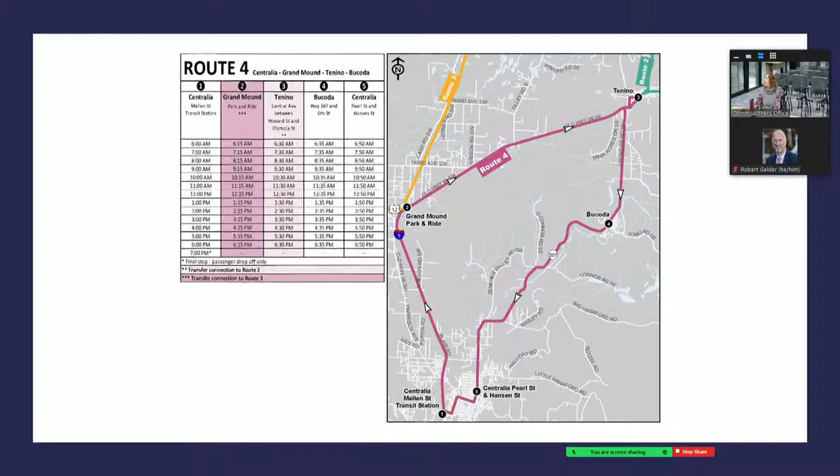We've also, I'm gonna back up just a smidge. So we did a whole revision of the layout of our rider guides as well. Now rather than being sort of a booklet, now each route has its own little trifold.

It looks like this. We've made it really easy to read where the transfer stops are, at what different times you can pick up the bus, and the map is really clear. And there's actually an interactive map online too.

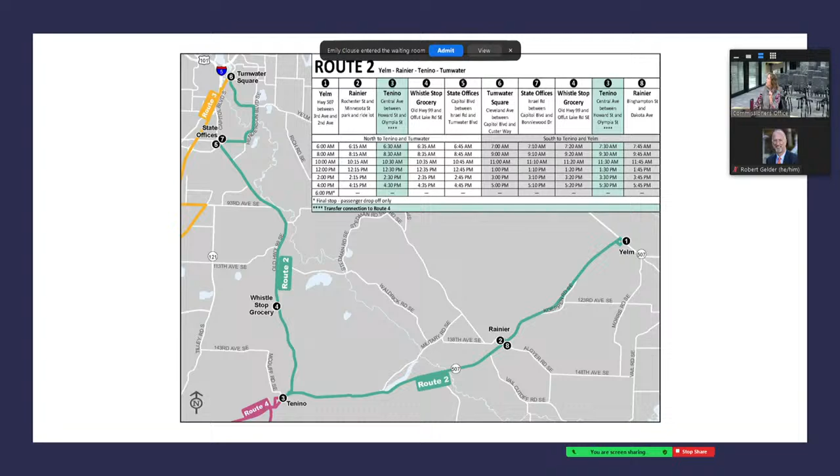So if you're looking at this on your phone, you can click on the different pieces and be able to see where your stop is exactly, where to stand in case the signage hasn't come yet to your space. So we've done that for all 3 of the routes.

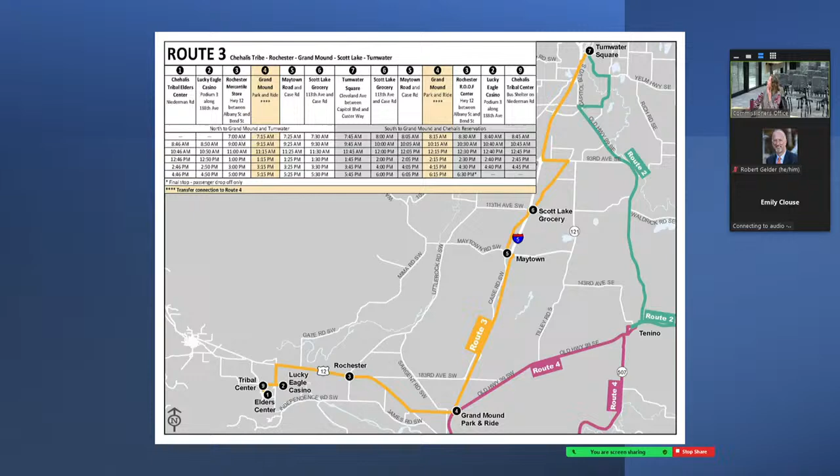As we move forward, like I said, we're going to hopefully enhance that with that new application for riders. We're also continuing to reach out to other partners to spread the word. Transit is something that nobody really thinks about until you need it. So we're trying to get out and talk to many folks and spread that word.

We're also talking to Pacific Mountain. They have done training before, and drivers is a limiting factor for transit all across the country. So we've been working with Pac Mountain over probably the last year and a half, in fits and starts, to try to get a training set up for drivers so that we could have sort of a pipeline established. That's something we've had a few discussions with them about.

I mentioned shelters. Shelters are going to be important. It's, outside today would be great to be undercover, but especially I feel for folks who have to wait in the dark, it just doesn't feel very safe. So we're working on that.

And then something else, because it's rural, we offer flagged down stops. That means if you're along the route and the driver sees you, and it's safe to stop, you literally flag down the driver to get them to stop and pick you up. It has to be a safe place, so that's something we need to educate our passengers on.

We want to give the passengers something so they can be reflective and visible, so drivers can see them really quickly. That's one of the next bits we're working on, making sure drivers are aware and can see folks, and that passengers know that if the bus zooms past, it wasn't because they weren't seen, it was maybe because they weren't standing in a safe spot where the driver could stop.

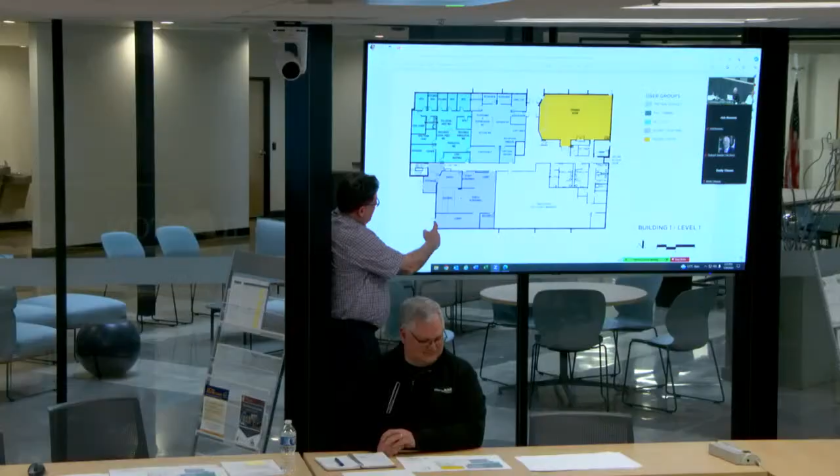Can you do that again? Right here, basically where you enter Building 1 right now. I don't see your pointer. Let me go up there and do it by hand, make it easier. So you would enter into Building 1 here, and you go through the kiosk or the queue for screening, go through the screening and come back out here. If this is the little covered area that goes to Building 3 down here, then you come over and go to Building 2 here. That's how it would work.

Then if you're in this building, you come through here and come back out this door to go into the rest of Building 1. I'm really confused, I don't know where's this, is this your front entry door? Right here into Building 1. Right now? Yes. That doesn't make sense, that's not off the parking lot. Oh, your front door is where you come in here. Yeah, I'm sorry, so yeah.

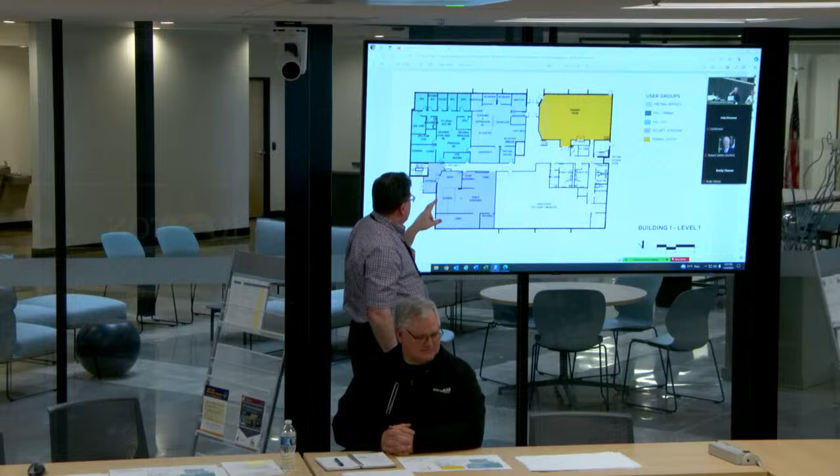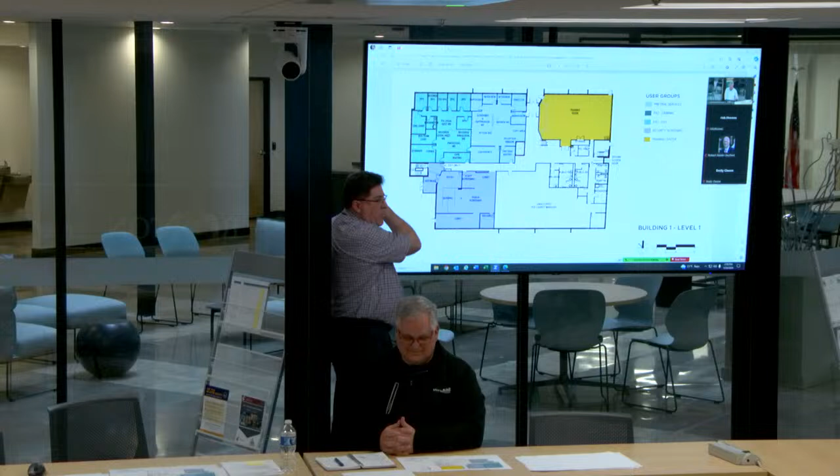The new training room is currently room 152. So why would the security, how are you gonna, you'd have to get into the courtyard to get into that entry point. That's why we're still discussing how it's going, because right now this is an open courtyard. You just come in here, go through the screening, and come back out here, and then we're working on how to screen.

That's the walkways, that's where we're gonna screen. Right, you're gonna come down that little path and go in, because you'd be out of the courtyard there, but then you come back. Okay, I got you. Yes. And that's still being developed. Would that still be public access up by where that training room is? No, no, no. So the only public access point would be through the screening.

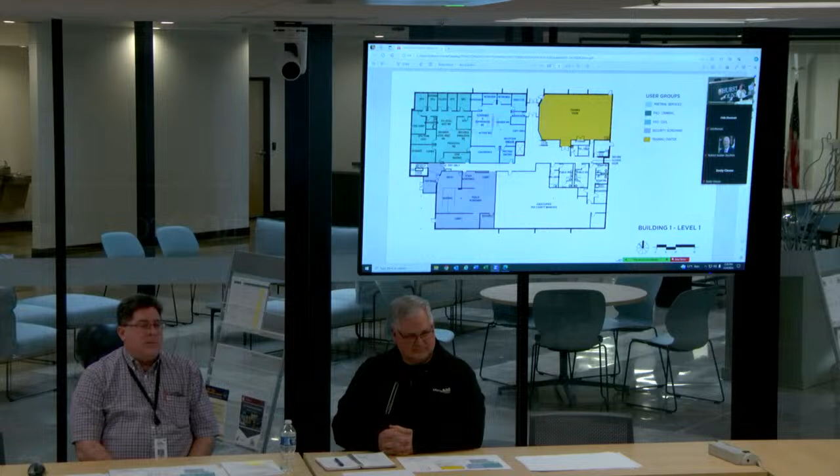Vestibule, yes, for screening. That way, building 1 has screening, and buildings 2 and 3 all have screening, utilizing one the same point of security screening.

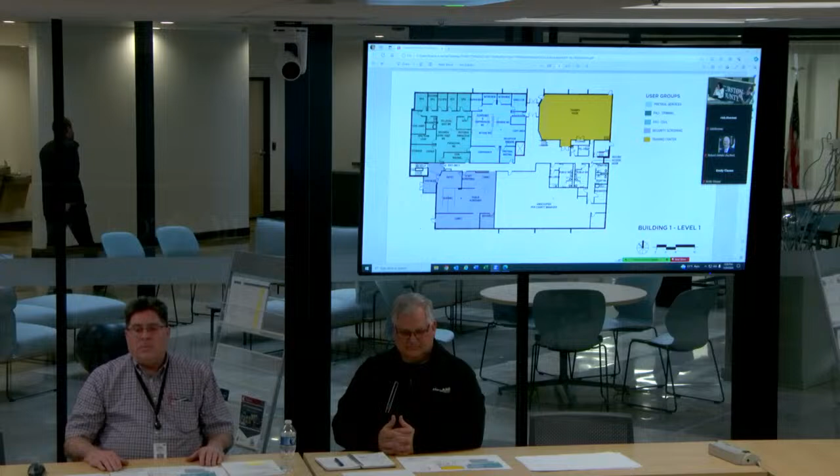On that quarterly training room, I'd take it there's gonna be a lot more use, like jury selection or something, that could be scheduled in that room as a regular activity rather than just quarterly. Hold that thought, we'll get to jury selection. Okay, all right, I'm with you now.

So the unoccupied space per the county manager, what's that whole area? There had been thoughts of a number of things going in there. At the first iteration, it was the clerk's office, but then there was an issue. The clerk wanted to remain in building 2. Is that area in there? Because of the vault, and because they want to be close to the courtrooms.

So the clerk is not moving into this building. Then one idea was to move probation out of the basement in building 3, because they're down in the admin section of the old jail. That's where they are today. We thought we could get them out of the basement — they've not been happy there, and there are egress issues — and move them into this building where there's plenty of room and they'd be in a secure area. But district court does not want them in a different building, even though it's right next door.

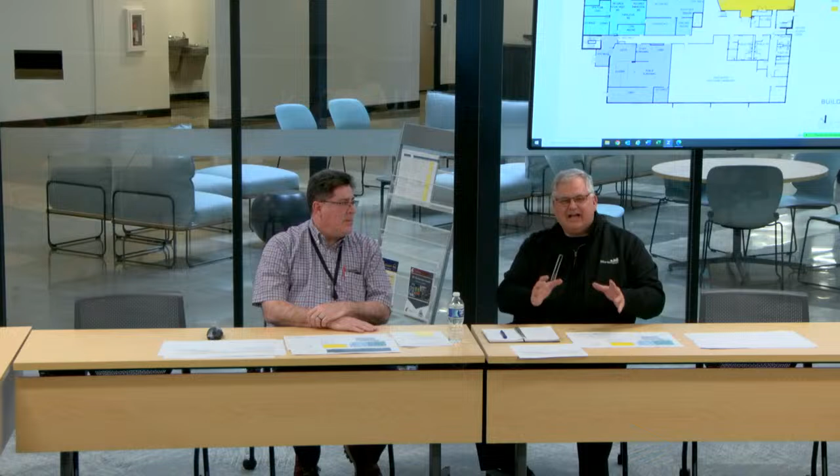If I might interject, moving people into the different spaces is two-dimensional chess. Unfortunately, we have three-dimensional chess. We can only touch less than 49% of the occupied square footage in this building, because if we go to 50%, we trigger upgrades required by code — seismic, fire protection, lighting, energy — which means you don't have enough money to do that in one building, let alone three. So this three-dimensional moving around has been tightly controlled to stay less than 50% in every building.

What I was thinking is that the state, AOC particularly, has been talking about doing a pilot program with the courthouses about childcare services for people accessing the courts. That's why I was wondering how much square footage was in there, because what stopped me before from even asking them to consider it was the spacing issue, knowing building 7 was way behind. I did ask them about infrastructure funding, but the space was kind of what it came down to.

Yeah, to bring any of the spaces in this building up to a standard for childcare — if you'd like us to look at it, we certainly could, but I doubt it's feasible.

How is this still just not putting lipstick on a pig? It is putting lipstick on the pig. What are you talking about? It scares me — we also have to think long-term with these same buildings. Just earlier we were talking about a bond and a levy to put more money in. How is that not into these buildings? I'm not saying that — this is campus though.

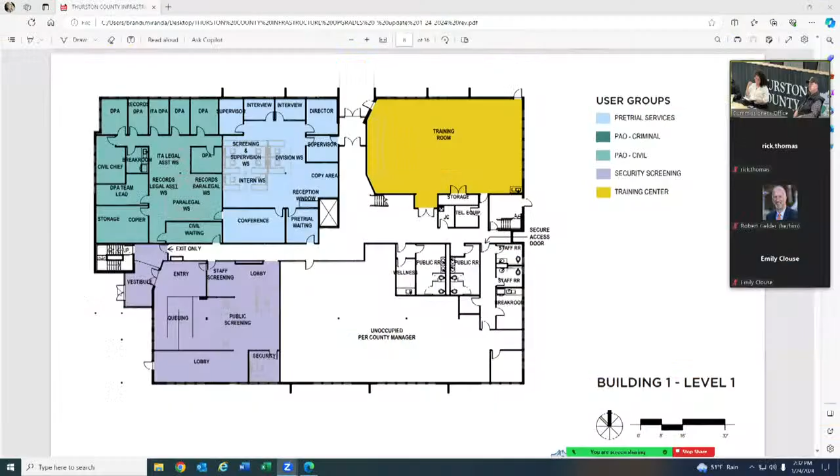Moving on to the next slide. This is the second floor, all prosecuting attorney's office, our public prosecuting attorney's office. We're still working with Heidi and John to work through the details to make sure it meets all their needs and requirements. We've got their feedback on it, so there's not much to discuss there.

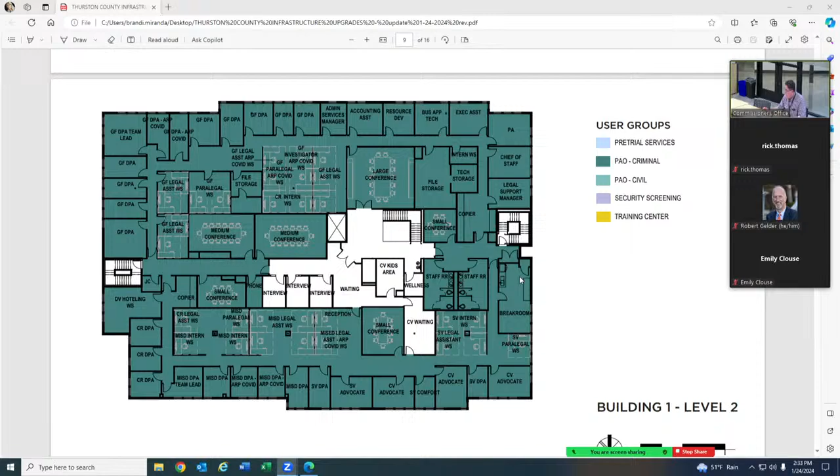Moving on to the next slide, let me go to the next slide that helps understand what's going on here. This is the first floor of building 2. What we're proposing, after listening to all the concerns of the stakeholders in building 2, involves the back hallway. Let me demonstrate on this slide to make it easier.

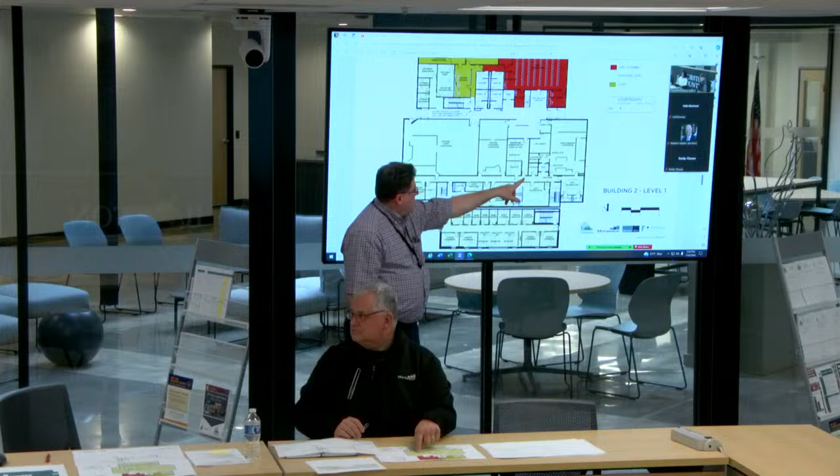The concern is with in-custody individuals meeting with the jurors, with the jury. Where's the elevator at, Tom? The elevator's right here. So they came up here, and if there was a detainee, then everybody had to scatter out of there. We heard that loud and clear, everybody on the team. So that was kind of one of our big priorities.

How do we address their needs and concerns? That's why you see, I can't remember the exact square footage, about 4,000 per floor, 4,200 square foot, a 2-floor addition to the building.

Since we've just, did you want to ask a question? No, I just wanted to let the chair know I had a question once you're done. Okay, so since we've done this, we met with the stakeholders, they had 10 or 12 major concerns.

We already have an updated floor plan, but I couldn't get that into the packet, though I do have it available. It shows a slightly different configuration where these have been spread out, with the entry into this area in the center, so they can come in and utilize both areas. The chambers for the court are in the back part, and all their administrative personnel are within earshot of each other. They're not crossing paths. If I go over here, this elevator was the path to all the courtrooms.

Right now we have a second entrance or exit to the elevator into a separate area for holding. Then they can move right into the area of the courtroom, so that way you can secure that individual. The same thing happens on the second floor, so both those courtrooms have an area to isolate the detainee. It also allows them to hold them there as they want to move to the other courtrooms.

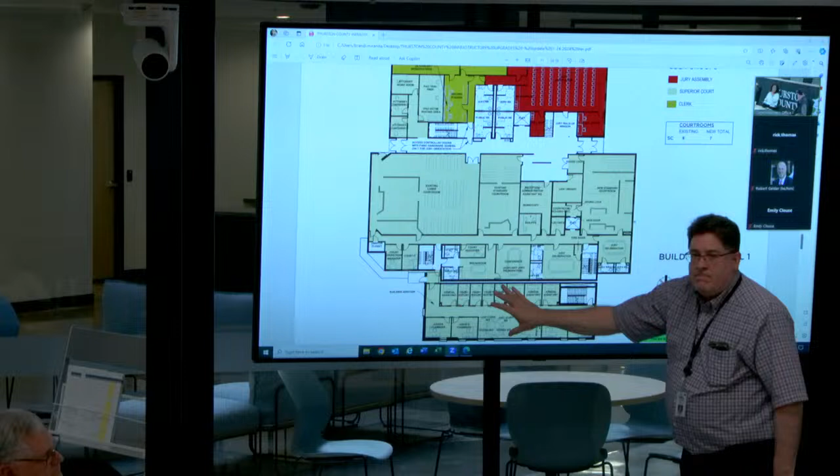I have concerns about the building addition and the feasibility of it. I've been asking about tearing down that old jail, and I've been told a million times that it's too expensive, but yet we're going to add an additional building when we have that empty jail just rotting away right next to it.

So we took the team into the old jail just to get their input and impact on it. Demolishing jail buildings is expensive because of the way they're built. Again, Mortensen and team wasn't going to come to us without a project that can fit within our budget. That's why we're not doing building 6. The scope of work it would have taken to upgrade it to house individuals there, we're able to reposition in building 2. This addition allows the courts to get what they need, allows for jury orientation, which is in the red up there, and allows the clerk to be in this building, on the second floor.

So that's where, as Marvin said, we're moving around places and locations to accommodate the wants and needs of the stakeholders within the budget. This creates more security in building 2 for the courts, and that was their primary concern, security. We managed to afford this by taking building 6 off the table. It's going to stand empty.

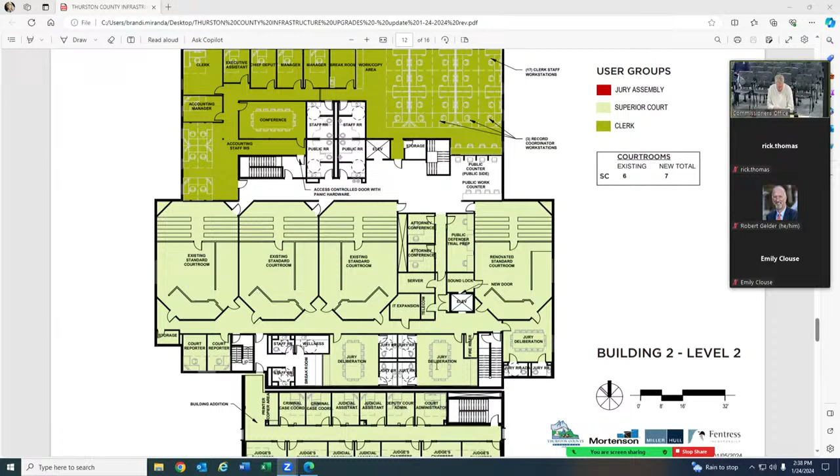The jury rooms are one of those things that was a big concern too. They've expanded to accommodate the 14 jurors a little more comfortably than the room that's about the size of these tables encircled there. So we listened to them and tried to incorporate as many wishes and desires they had, and hopefully we were able to meet that.

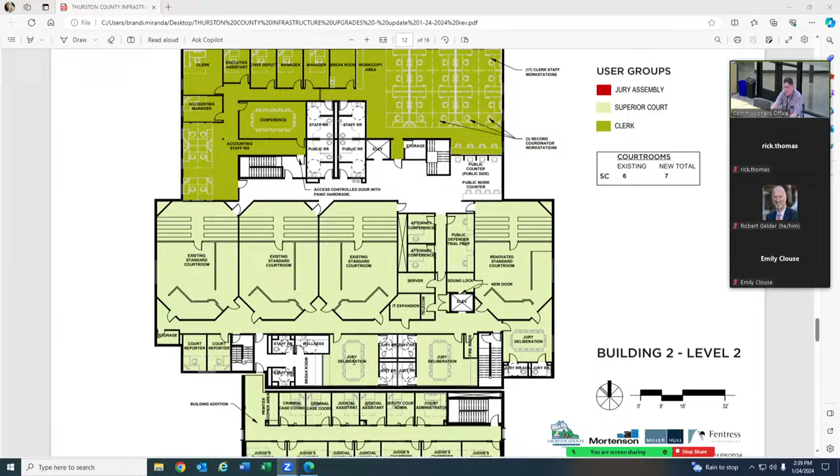On the first pass meeting with them in December, they seemed very pleased. Some minor adjustments were able to be incorporated. Again, if you need copies of these we can get them to you later. We have updated floor plans of this building moving forward.

Going back to the drawing I skipped, since this will come out, it'll be elevated at the same level as the ground floor now, so it'd be covered parking in this area. We're proposing enclosing this whole area securely, so all the judges for both Superior Court and District Court can travel easily within the space. That's also been modified a little bit in our recent update.

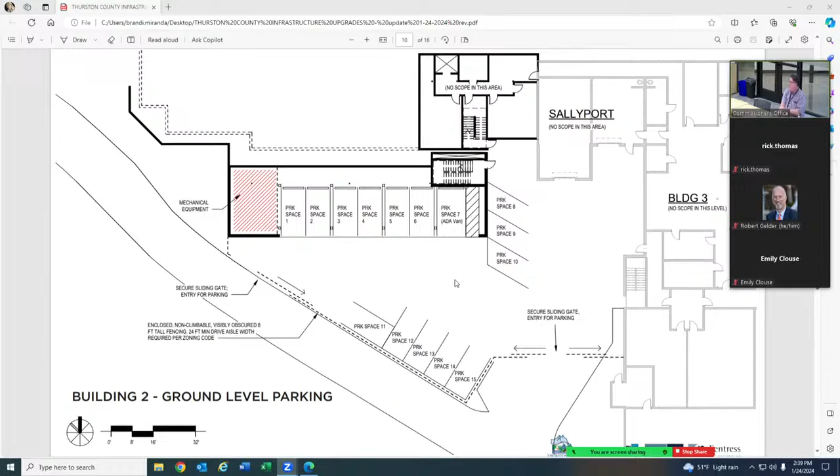Then moving to building 2, how many courtrooms do they have now? Building 2 is getting one extra courtroom. They currently have 6, and they're going to 7.

One of the questions that came up: can the jury orientation room be used as a courtroom in the future? We discussed it, I can't remember the answer. It can, but not as easily for jury deliberation, and also for backup courtrooms. There may be court or legislation that says they need another judge - maybe you can help me out on that. I don't know the particulars, but that's the message they gave me. I don't know the truthfulness of it, so they may say, do we need another courtroom? So there are possibilities, but it's not feasible right now based on what we're trying to accomplish in this project.

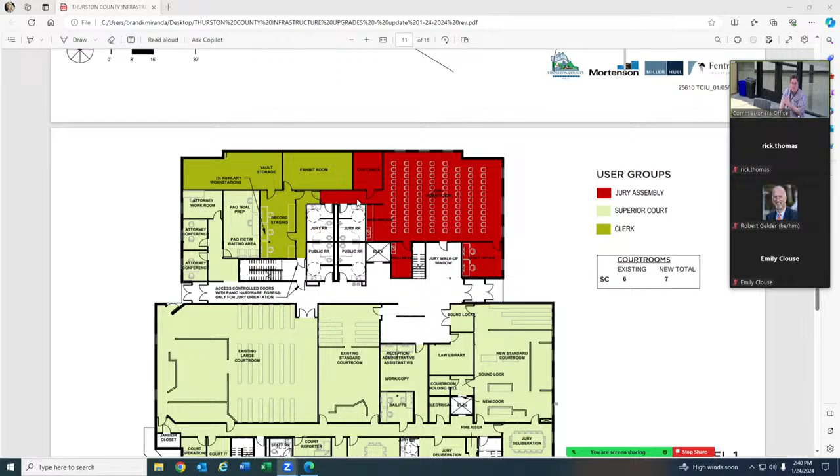So right now, that would become the new jury selection, jury orientation area, seating 150 individuals. They did mention that sometimes they have a larger group than that, and we can use overflow space - the large conference training area they're currently using in Building 1, if needed.

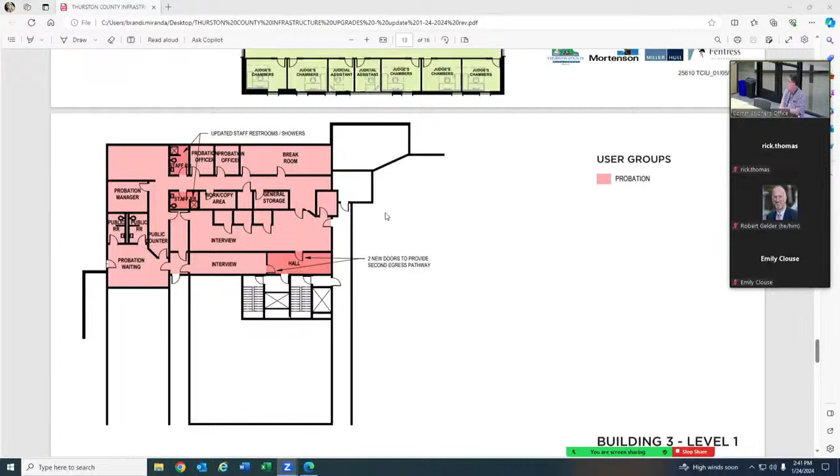So moving to Building 3. I almost hate to show this because of what was changed on this one, if I can find it rather quickly. We propose what you see on the screen there.

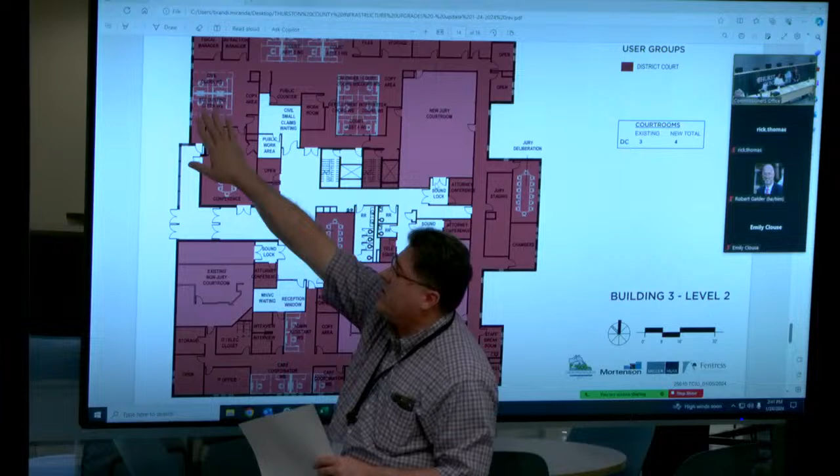I'll use my map here. When we presented this to district court, they were concerned, as Robin said - they want probation to come up from the lower level. So in essence, this was their small old courtroom in this area, and they proposed moving probation up into this area. We reconfigured this - I don't know how well you can see the drawing - probation is in this area, with the other parts of their requirements reconfigured as well.

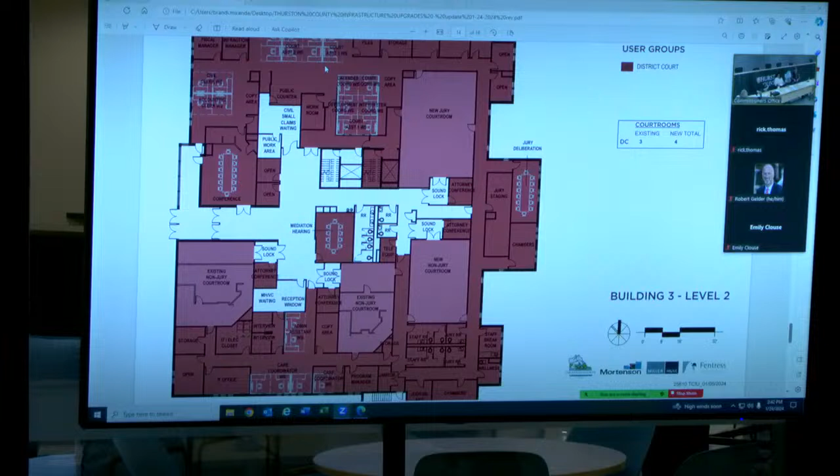We're meeting with District Court on Friday to present this drawing to them - they already have a copy of it. That's how dynamic this project is; it's changing quickly as we hear the needs. What can we accomplish? Can we still keep it within budget?

The team in the background - we have a core team that meets once a week to discuss these things. They're kind of like the Keebler elves, working like crazy behind the scenes, going through 2 or 3 iterations, and then they present to us what we can build within the budget and move forward with.

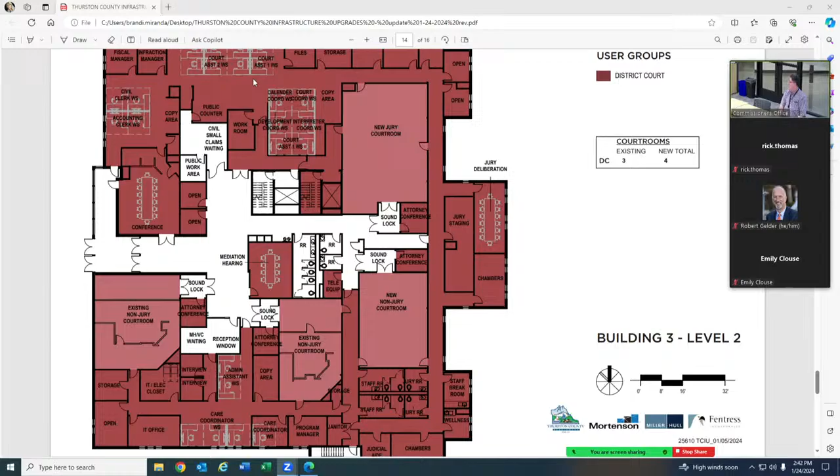So district court is choosing to squeeze themselves all onto one floor in Building 3, and they get an extra courtroom. Yes, an extra courtroom.

Due to budget cuts, probation was leaving. I wouldn't assume there'd be much squeezing if that's what they've decided to cut - supervised probation. How big is their probations department? One person does online monitoring essentially. They said they accommodated 13 people based on what they told us their needs were. That's the number as of this decision to cut, to get money back.

When they come to you saying we don't have enough space, it's because they wouldn't consider other options for probation.

So in this version, they had this lower level space for probation, but in the current version that's gone away and they've moved it up to ground level. What do they use the lower level for then? Nobody - that's the administration area in the old jail. So that will again be vacant and not used, and the only thing we're using any of the old jail space for is day holding for inmates coming to court.

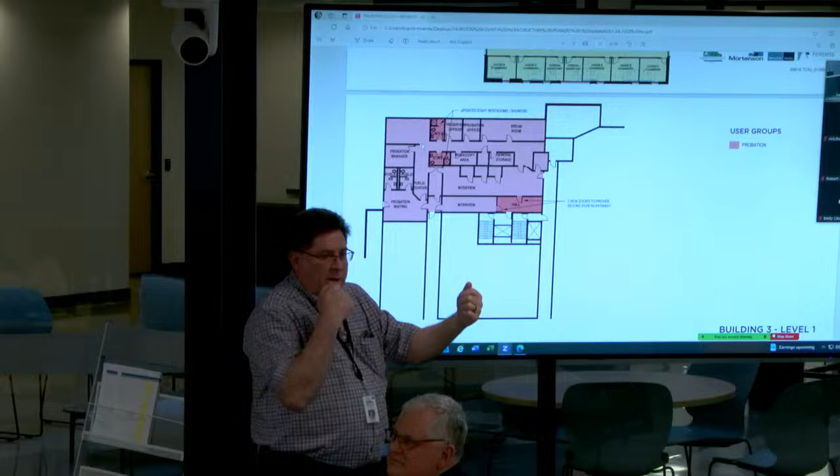No storage in there anymore? We're storing stuff down there, Sheriff's got some of that space. But there's still offices down there they could use - for probation? It's still offices that could use for probation. These aren't really offices - there's a large space with some cubicles, one office, and they've kind of ad hoc their operations to fit because it's CMU walls. This area is like what you see on TV, the pass-through window where they talk on the telephones. It hasn't really been done - we put a little carpet in a small area and called it an office.

We accommodated their needs at some point, I believe during COVID. Is that the reason? Yeah, COVID request. And we believe it doesn't meet code for exiting as it's currently being used - potential L&I findings - but we managed to work around it.

I have another question regarding sheriff's evidence. I know he came to the board concerned about having to move multiple times. Is he going to be staying here until there's an arrangement for his long-term plan, or what does that look like? For evidence, it's staying put because it's not in our program. The sheriff's department we were proposing to move from the second or ground floor is moving over to building 5, but that's in flux right now depending on if and when he gets a building.

The evidence he wanted consolidated, so it all depends. If it's going to take a while to get him into his own building, then he'll have to move to building 5 so we can proceed with the work and stay on our timeline for the rest of the upgrades. If we're successful finding something quickly to move him into, then he won't have to move to building 5. We're keeping that in mind as we move forward, but at some point he's gonna have to move or he'll hold up the whole project.

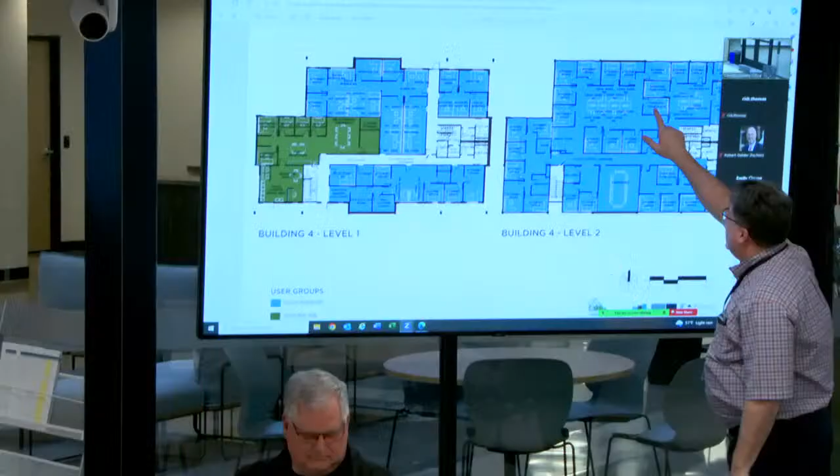We've had some upgrades since we printed this drawing. One is he wants this area turned into 5 offices. There's an existing copy area here you can walk through, and offices—3 offices over here where there used to be 2 large ones. So minor upgrades with him.

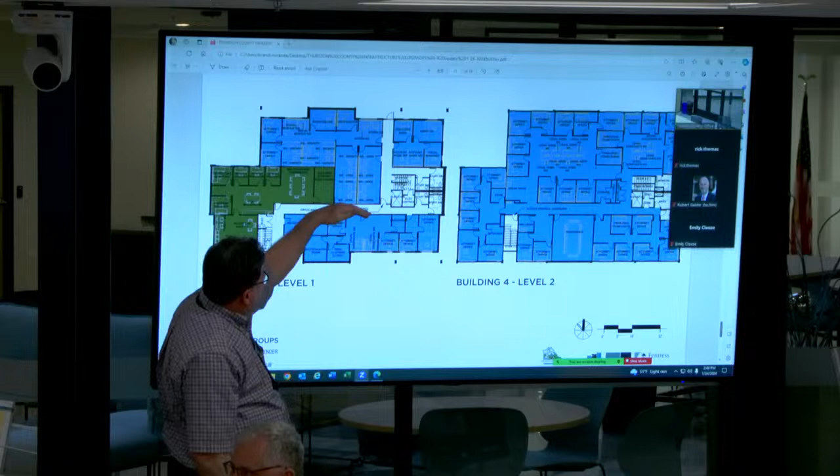We walked it through with them. He's worked with Nathan and the Resource Hub, and they understand the space sharing. One of the other things is this door allows this area to be secure, so there could be a public restroom down here for the Resource Hub to use, with separate restrooms for staff up there. So we worked with both stakeholders in that area.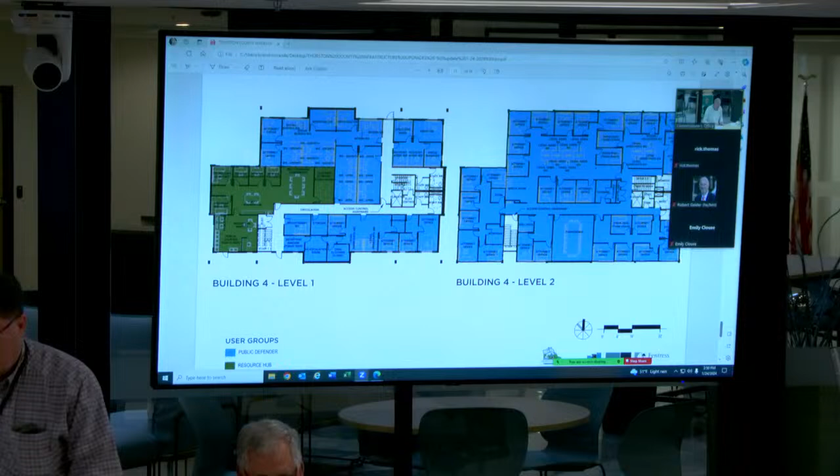Resource Hub was one of the programs scheduled for Building 6, but it's been relocated back to where it's currently at, just growing the space about 50%, because building 6 just can't be used for anything. Well, that's why we have Jason in the audience—he highly discourages us from using it because of the condition it's in. I mean, it's working, but...

Rick sent us an analysis on building 6. Rick, perhaps you would speak to that. I'd be happy to, Robin. Rick Thomas, the project's capital planning manager—I've done a bit of research into the building, just a little background.

Building 6 was constructed in 1978. There have been no significant infrastructure upgrades to that building at all, so as you can tell, it's going on 50 years old. It presently needs its roof replaced—there are leaks right now that the facilities group takes care of the best they can. The air conditioning and heating system in there have never been upgraded, so they're well past their normal 20 to 25 year lifespan.

It's a space that, to do any sort of other modification to, would cause us to have to do all the upgrades that Marvin from Mortenson already mentioned. We'd need to completely fire-sprinkler the building, do all the upgrades for seismic and our fire alarm system, and upgrades for all our energy systems, including lighting and whatnot.

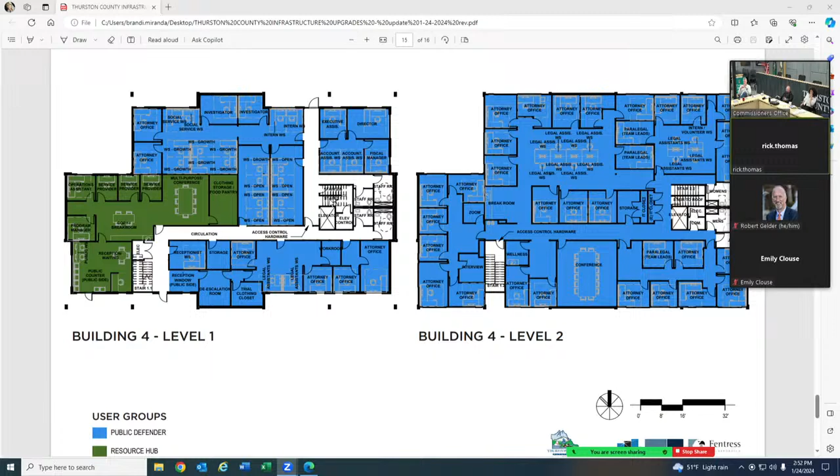I know Jason is in the room, and I know there are ongoing issues he has with maintenance just because of how old the building is. Aren't all the buildings pretty much in that condition? Yes, they are. So they all just need to be torn down?

I'll leave that answer to somebody else. I have my opinions on it, and again, as Robin indicated before, this project we're doing is Plan B, and the goal of this is to get us 7 to 10 years of additional time so we have an opportunity to put together a long-term plan for facilities that would meet the long-term needs of the county. But spending $50 million to limp along for 7 years is a tough pill to swallow.

Well, if you do the semi-simple math on it, you're talking $5 to $7 million per year to keep the facilities at least usable for that time period. How much does it cost to do nothing for 7 years?

Well, I think the issue that we have is if we don't do anything, we do not have space that meets the needs of the county departments that we have. But that's been the story for the last 20 years, right? But that's what the board made a commitment to the stakeholders that they would address.